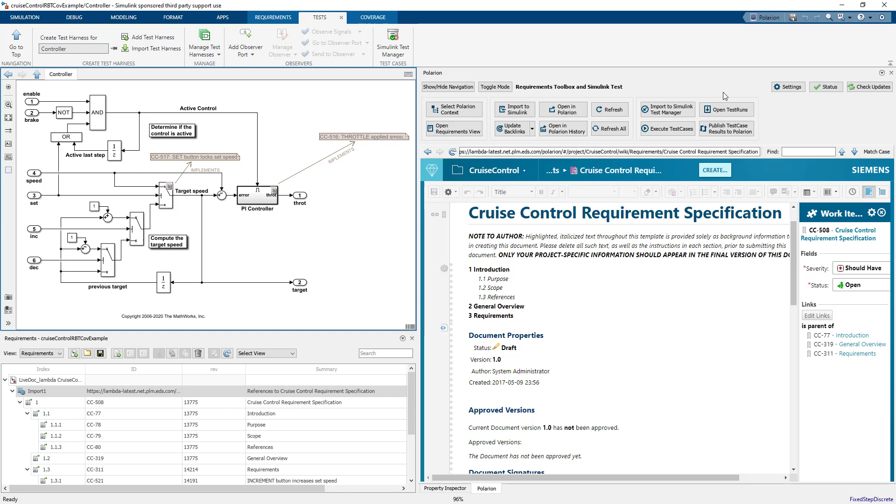So right now we have a requirement specification that's been imported into Polarion, linked to some blocks, and then we've created backlinks inside of Polarion for those blocks as surrogates, and then those surrogates are linked to the requirements back inside of Polarion. So what I can do now is I can switch to our test case specification. We've called it high level cruise control test case specification.

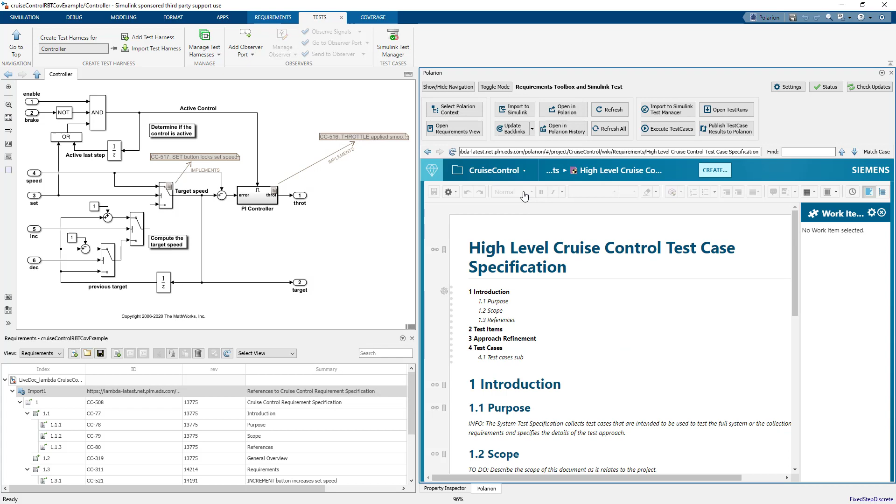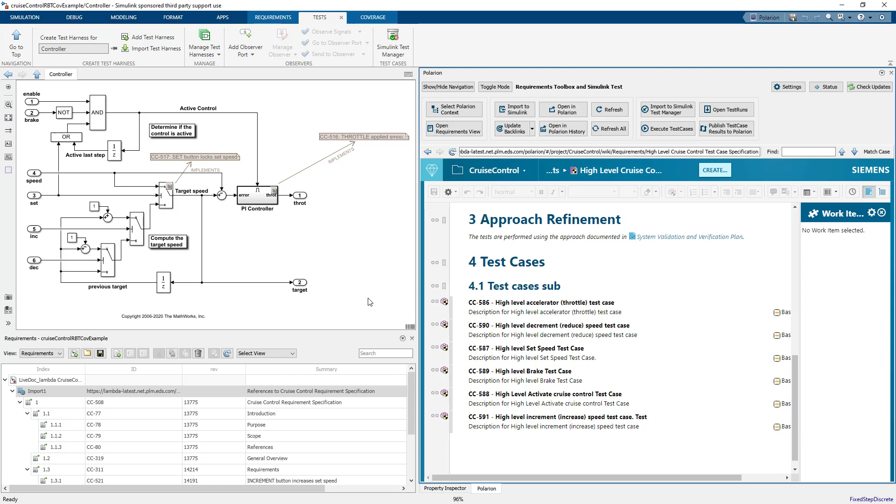If I scroll down in the document, you can see that we have a number of high level test cases that we've created. You'll notice that there's some new buttons now available in the requirements toolbox and Simulink test mode. And all we need to do to import these is to click on the Import to Simulink Test Manager. And what we'll do is we'll take these test cases and we'll create those tests inside of Simulink Test.

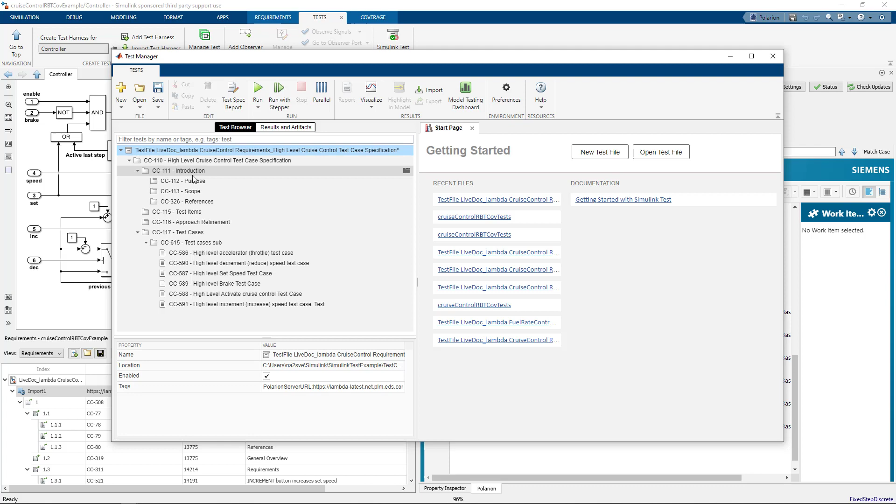So you can see Simulink Test launches now, and you can see the document name. I'll just make that pane a bit bigger. Name of the document. And if I expand all, you can see that the hierarchy of the document is maintained. The headings inside of the document are test suites inside of Simulink Test, and then you can actually see the actual test cases that have come over.

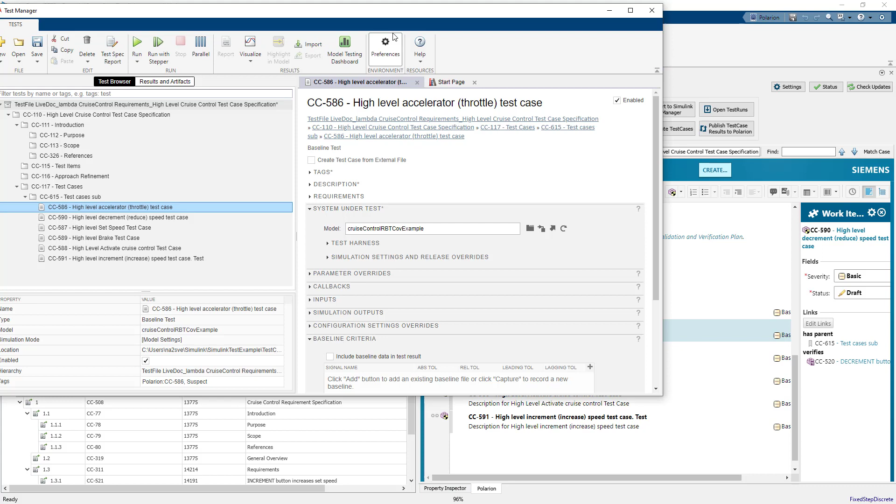Now, some of these test cases already have links to requirements. So if I select, for instance, CC590, you can see that it verifies this requirement. So if I switch back to Simulink Test and look at CC590, for instance, and then look under Requirements, you can see that that requirement relationship also now exists. So the connector automatically created those requirements links to test cases and vice versa.

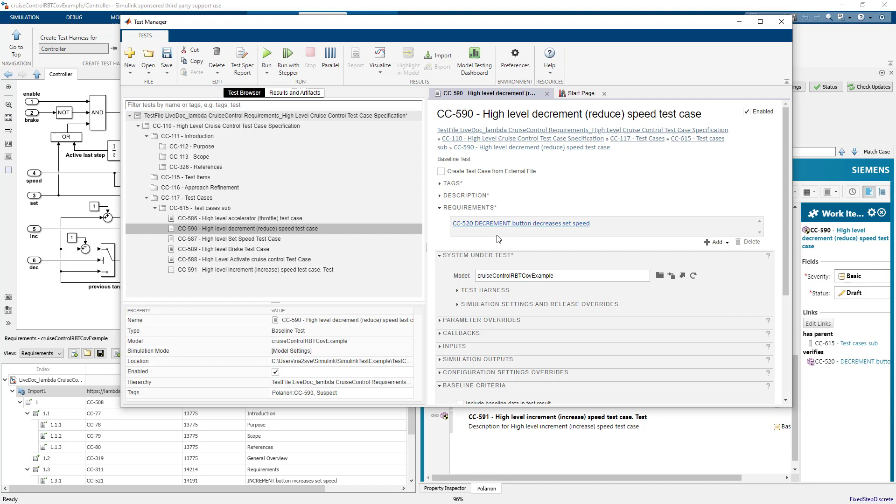You can, of course, modify the document and re-import it, and the changes will be reflected in Simulink Test. You can delete test cases as well. You can also work with revisions of test case documents, but only one revision can exist at any one time in Simulink Test. So you could switch from a head revision like we are today back to an earlier revision, or you could have an earlier revision and switch to the head, or a later revision even as well.

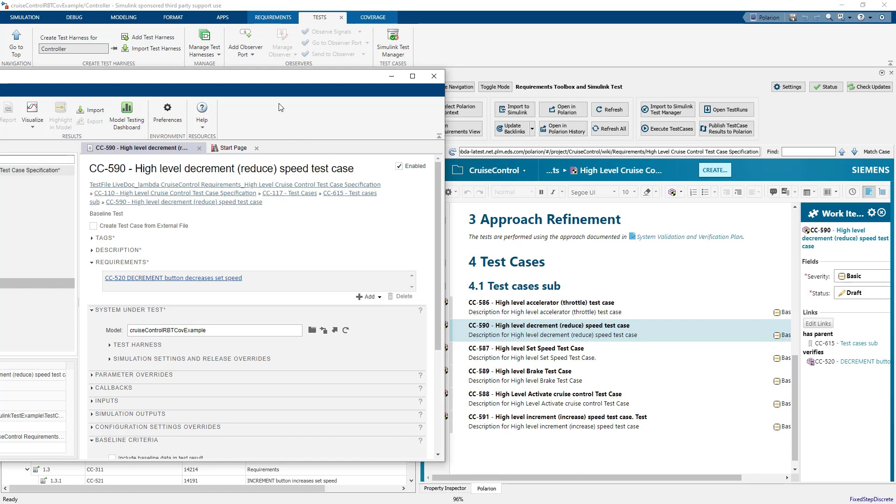You can also work at the project level in Polarion as well, where you're at the tracker view and you've got your test cases, for instance, in the tracker view. You can import those as well, and it would come over as a sort of flat list. And you can also change the behavior even when you're working with the documents. You can choose to ignore the headings and just import the test cases, or you can convert headings to test cases. There's all sorts of different possibilities, and you'll need to check the documentation to do all of those things.

Anyway, once the test cases are over in Simulink Test, and by the way, the descriptions of course come over as well, you may decide then to do one of two things. You could further refine these test cases and make them very specific to the model, add in specific parameters and test scripts and test benches and so on. Or you may choose to define those lower level test cases that are specific to the model and author those directly inside of Simulink Test.

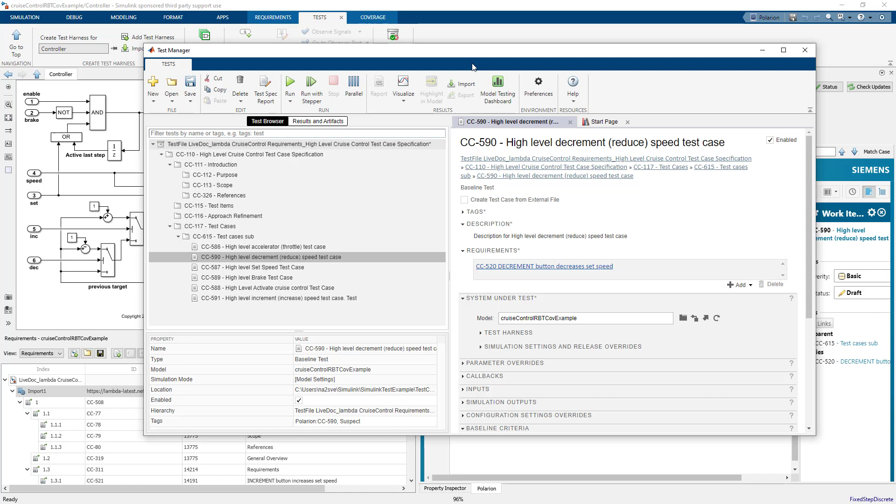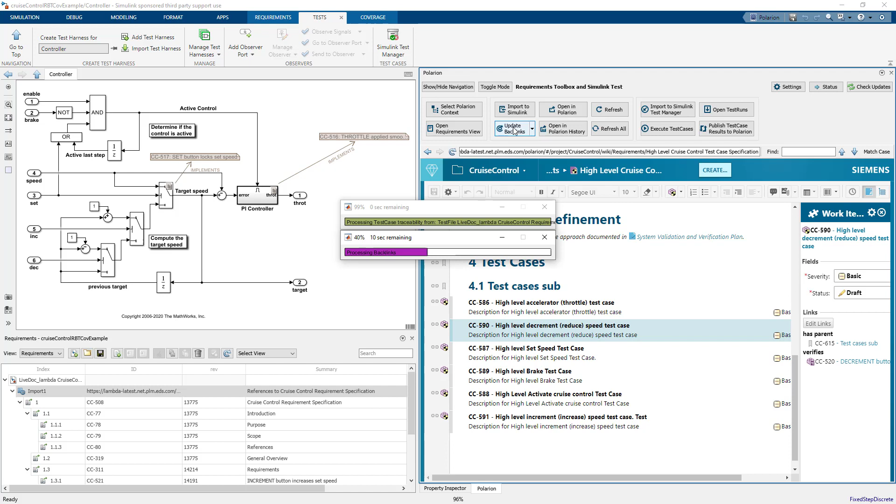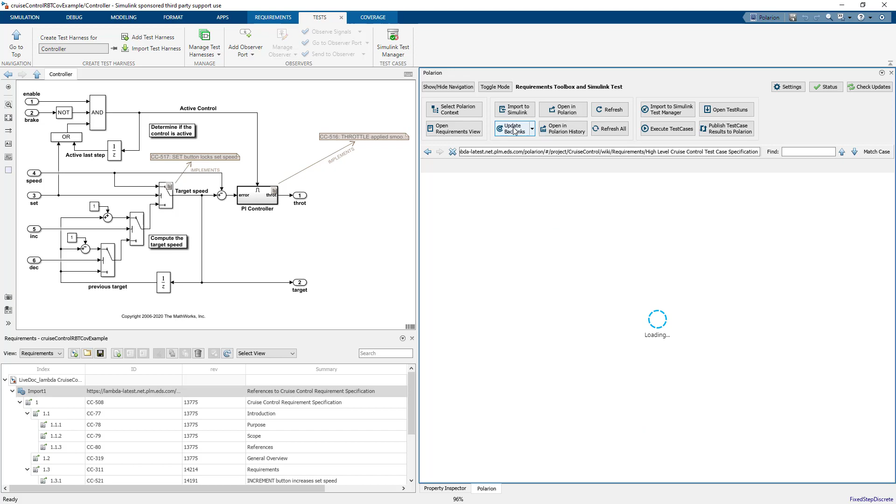In either case, and we'll look at that second case in a moment where we author the test cases directly in Simulink Test, once the test cases have come over from Polarion into Simulink Test, you can choose to update the backlinks. Okay, so what will happen now is if you had modified those test cases that came from Polarion in Simulink Test, when we update the backlinks, we don't modify those original test cases in Polarion. Instead, what we do is we create surrogate test cases for each of those test cases that originated from Polarion.

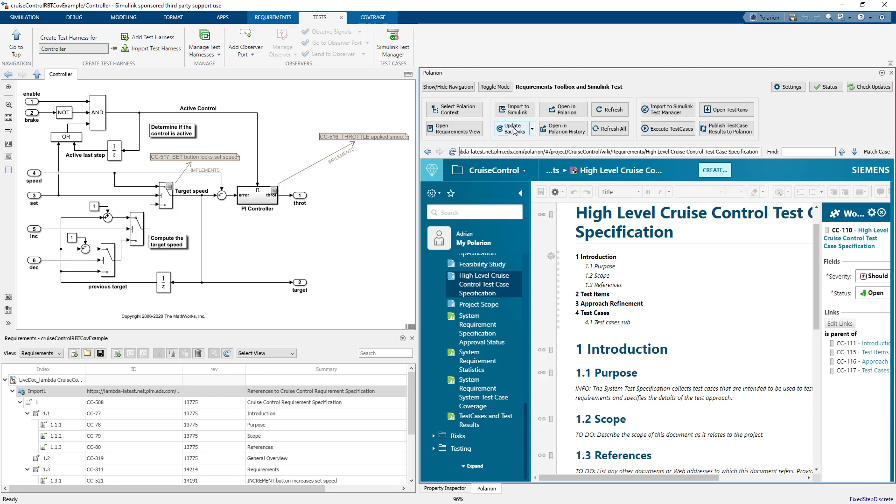Why do we do that? It's because we feel that we don't want to touch the original test cases that came from Polarion. We'll leave those alone. You've refactored those test cases inside of Simulink Test, and now those refactored test cases are reflected back in Polarion as surrogate test cases. And of course, we'll link them back to the requirements.

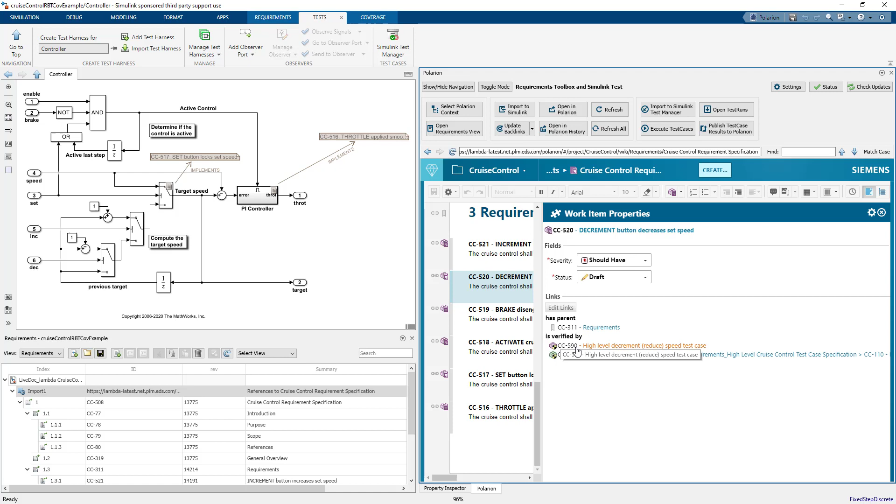So if I go, for instance, to the requirements specification, and if I go down to CC520, now you see that there's two levels, if you like, of test cases it's linked to. There's the high level test cases that were already there to begin with, and then this lower level test case that came from Simulink Test.

And you can see various parameters that are associated with the Simulink Test case. You can see that it is a test case. And it's linked back to, obviously, the original requirement. And there's also a hyperlink that points back to that test case. So I can go from the surrogate test case back to the test case in Simulink Test as well. All right. So that's kind of how that behavior works.

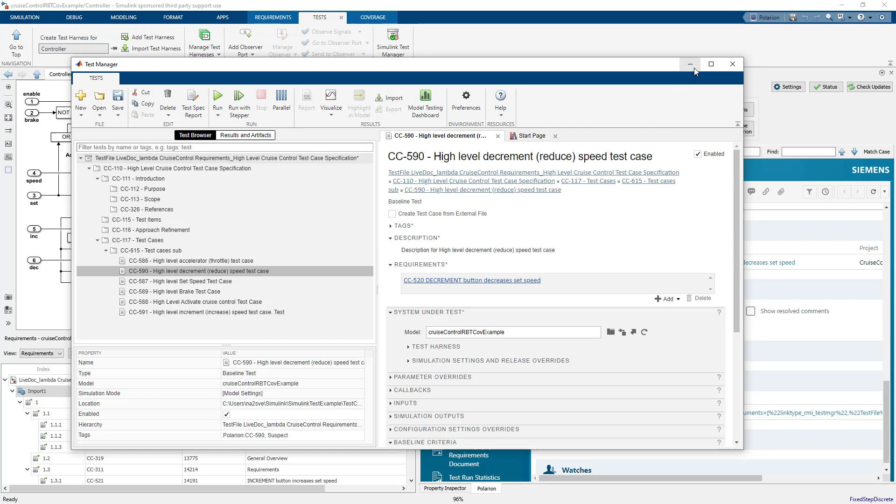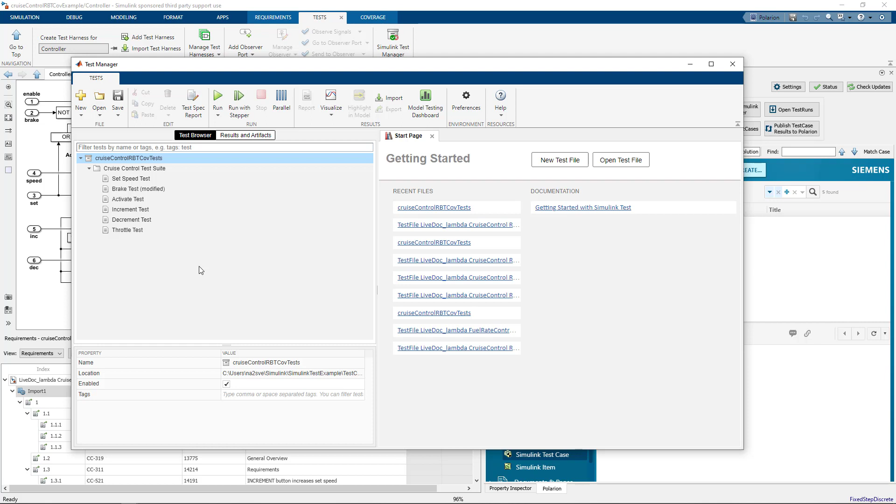But now let's imagine that instead of this, we author the test cases directly in Simulink Test. So what I'll do is I'll get rid of that old test file that we just created that originated from Polarion. Instead, what I will do is I will open up a set of test cases that I authored directly in Simulink Test.

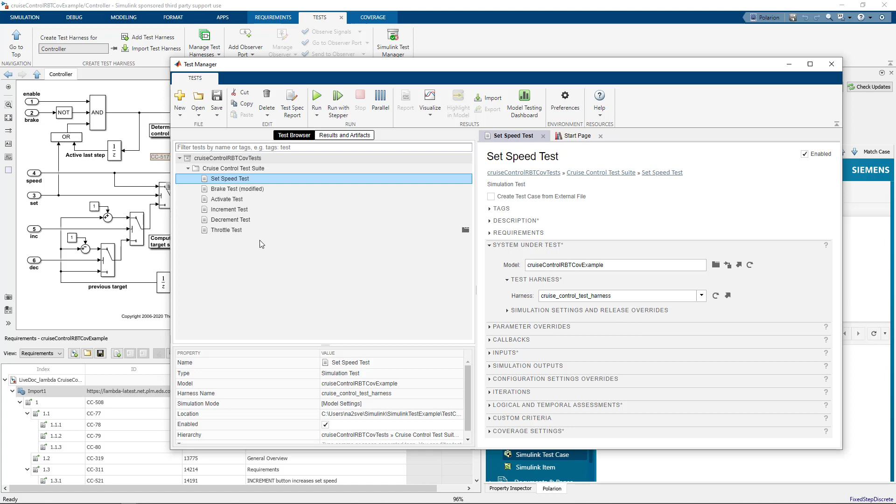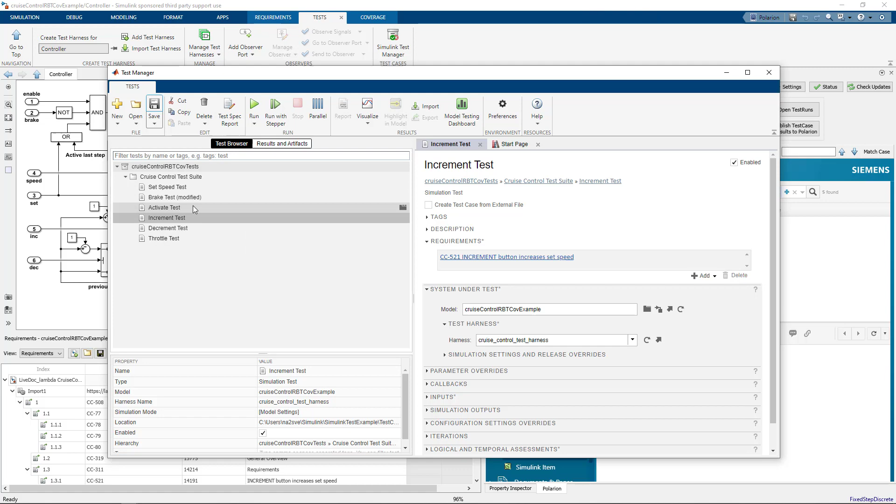Now, each of these test cases have been linked to a requirement that originated from Polarion, as you can see here. There's another one. So what I'm going to do right now is, let me just save that. I'm going to update the backlinks for this set of test cases that originated from inside of Simulink Test. So let's click on Update Backlinks.

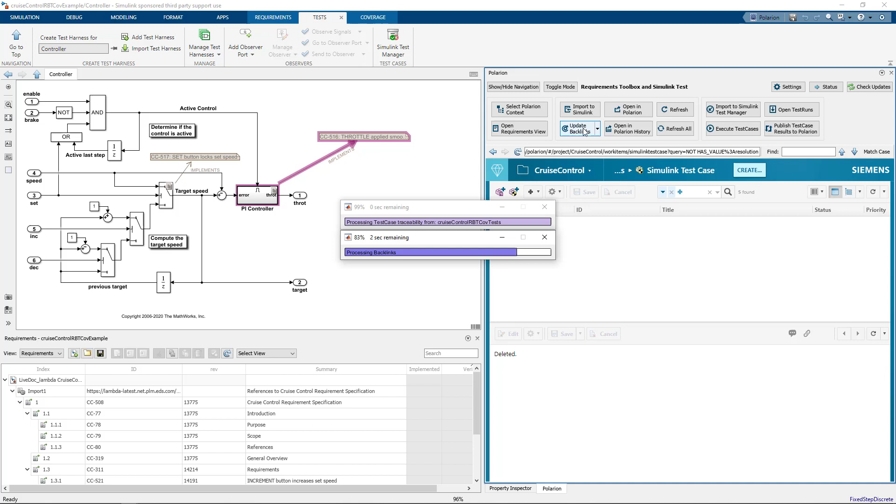And what the connector will do is it will create surrogate test cases for all of those test cases that were authored in Simulink Test that are linked to requirements that originated from Polarion. So you can see here on the screen that we've now got 6 test cases that were authored directly inside of Simulink Test, and they're automatically linked back to, of course, the Polarion requirements, as you can see here.

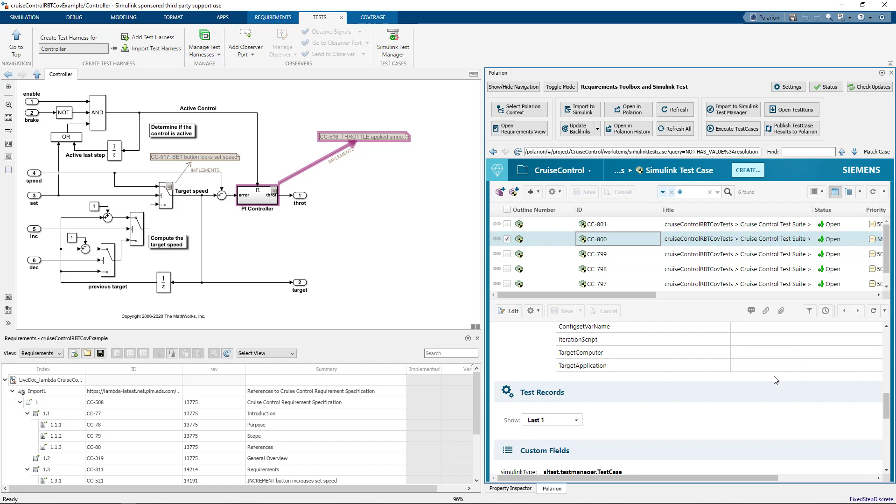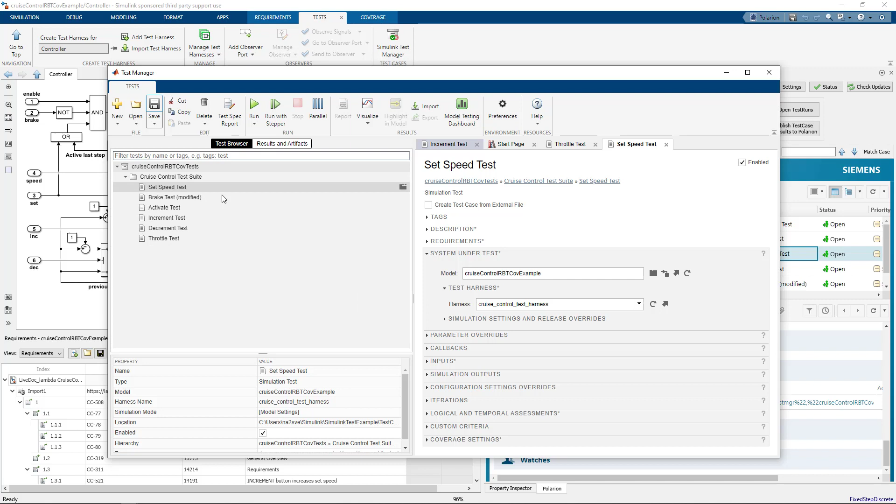If I scroll down, perhaps here, you can see again the properties that are associated with this Simulink Test, and of course also there's a hyperlink that navigates me back to, that's the throttle one. Let's just pick another one. Let's pick set speed, for instance. Let's navigate back to that one, and you can see that it navigates back to set speed here. Okay, so that's how that works. The connector works when you author the test cases directly inside of Test Manager.

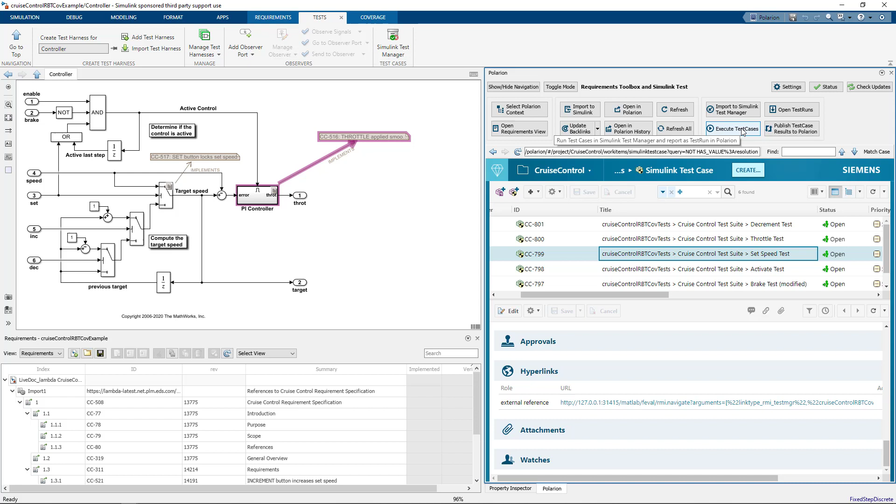So one thing that we can do now when it comes to test execution and test results is that we can execute the test cases directly from the Polarion connector to Simulink pane. So what this does is it will execute those test cases that I've authored in Simulink Test, and then it will collect the test results from those test cases that have been run back inside of Polarion as test runs. So let's just go ahead and do that now. Click on Execute Test Cases,

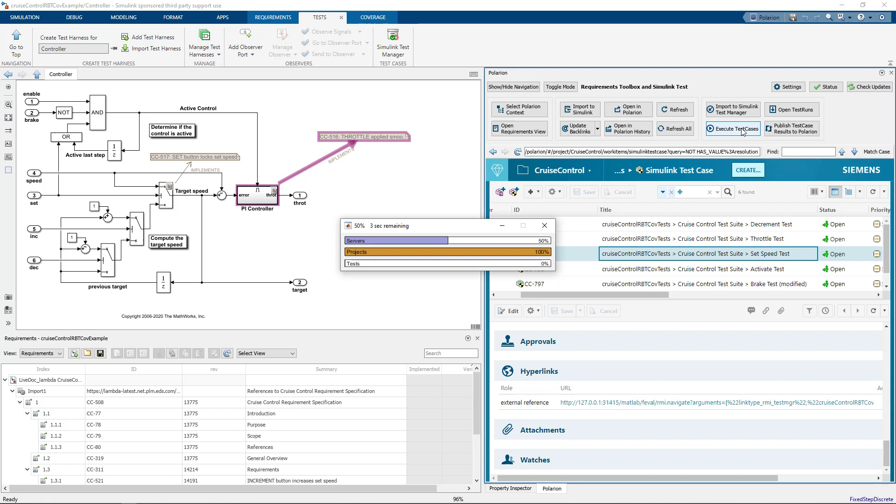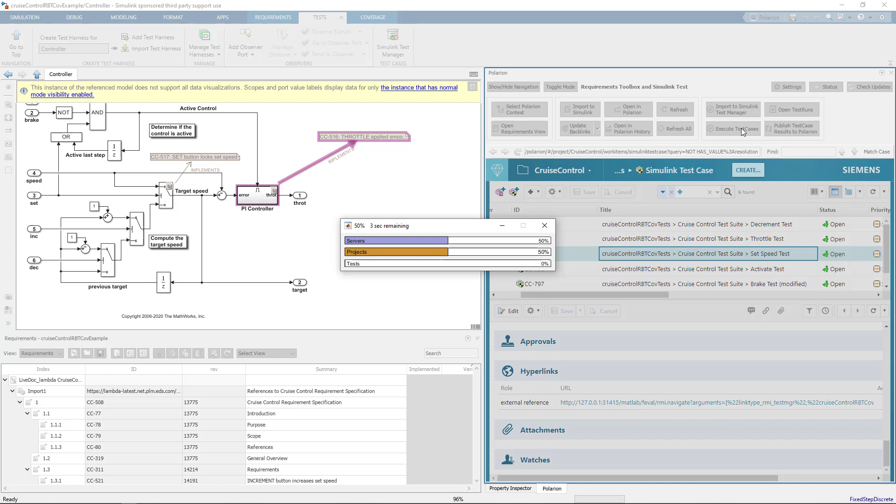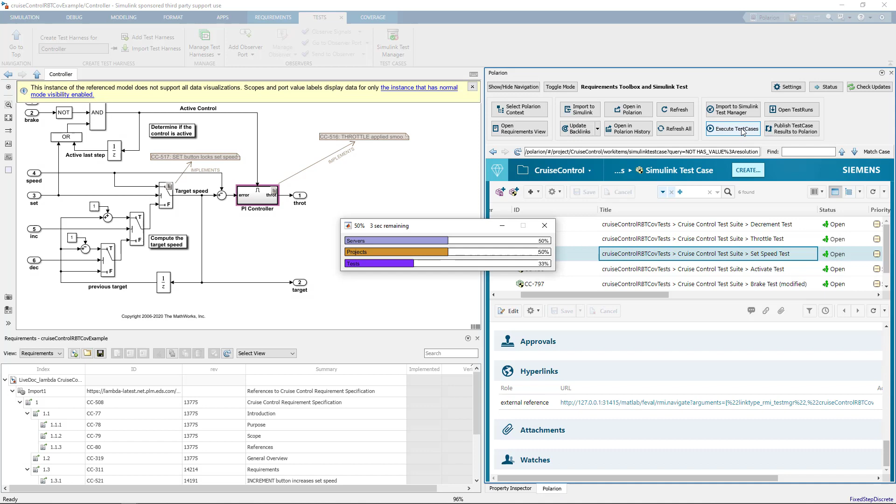and we'll see the model compiling and then running those test cases. So it's going ahead and compiling now. It's starting running. And it's running through the tests one by one. So there were 6 tests, if you remember, that we're going to run. So it's going to run them all. There it goes in purple. So it keeps going through, giving you a percentage. And it's 100% now.

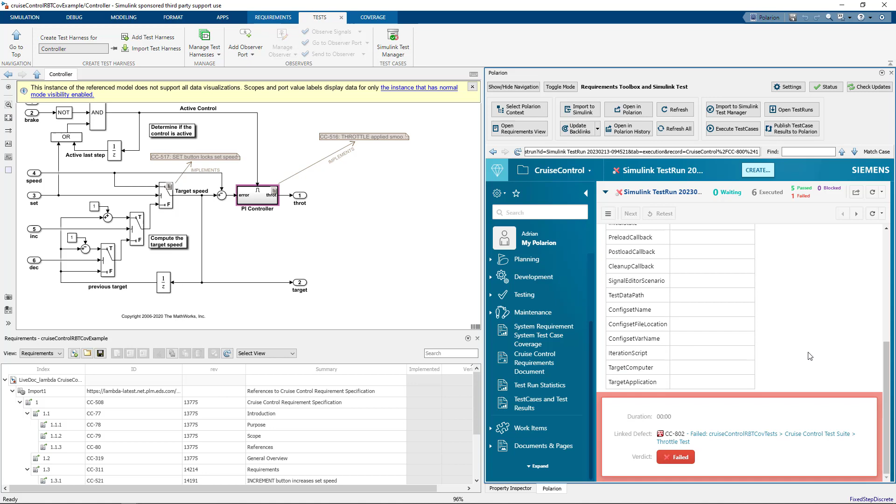And it's come back, and we can see that, in fact, the test case failed. The overall test run failed, I should say. And what's happened is that 5 passed and 1 failed. Okay, so if I select the one that's failed, I can see it's the throttle test. What Polarion has done automatically is raised a defect against that failed test case. So if I select the test case, we can see more information about that, and we can see how it's failed.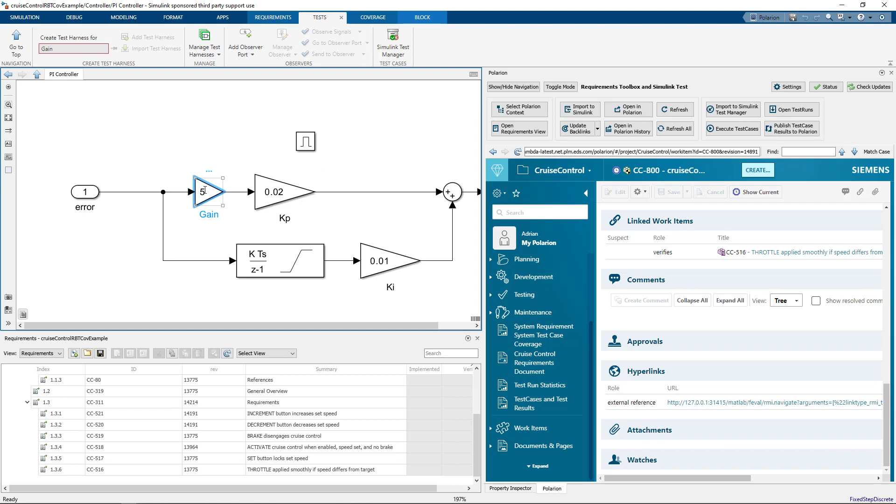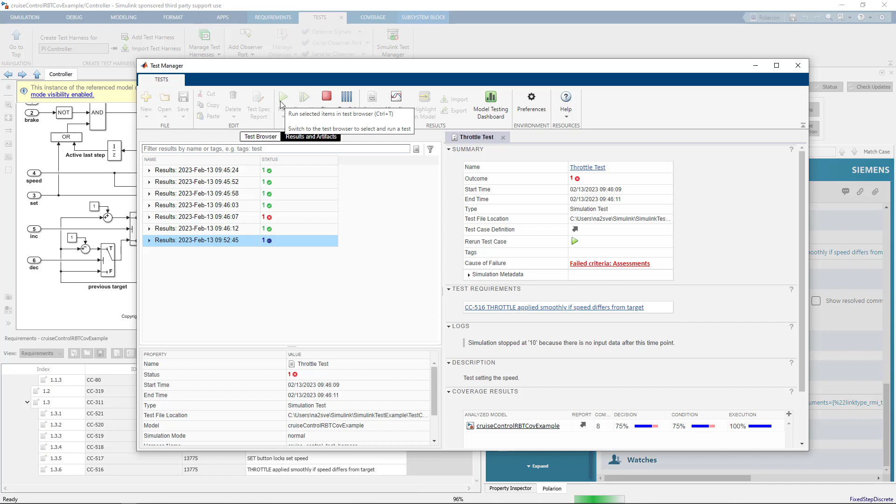Let me select it. Let's go ahead and navigate from Polarion to the test case. We can see that the throttle test failed here. So what I can do is I can go ahead and fix that right now. So let me go ahead and do that. Oops. Change that. I'll go back and save the model. And then what I will do is we'll go back to Simulink Test, and I can choose to run that test directly from Simulink Test rather than from the connector pane. You can see now that the throttle test passed after making the update.

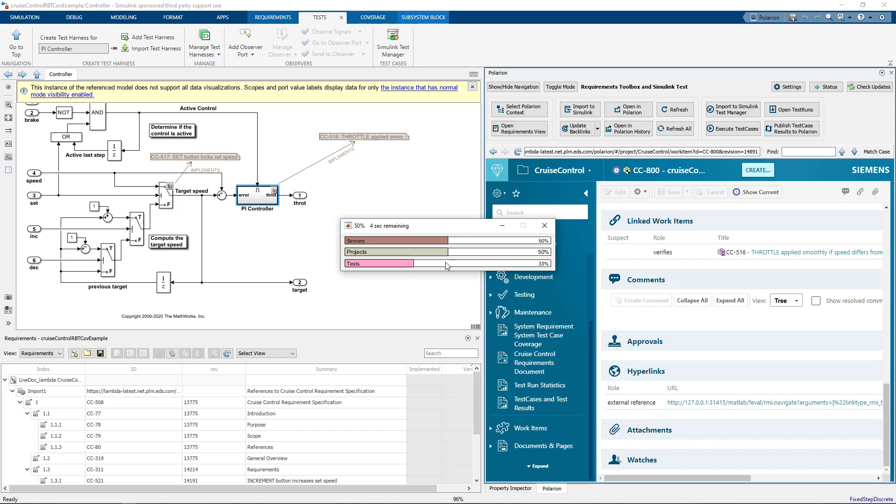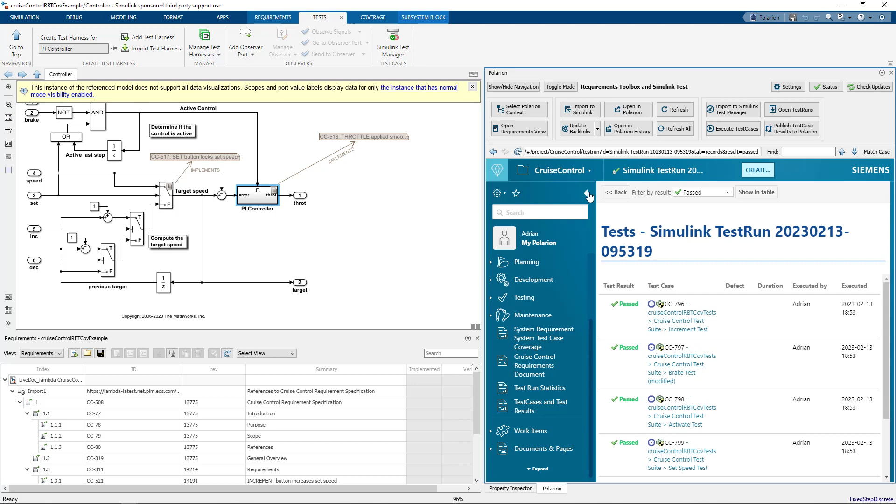So what I can do is I can go back to Polarion, and rather than running the test like I just did from the panel, I could just collect the test case result that I just ran directly in Simulink Test and update it back inside of Polarion. So it'll be reflected as a new test run in Polarion, but we'll show how that works. So you can see here now that all 6 tests passed, and you can see them all shown here inside of Polarion. So that obviously is all good.

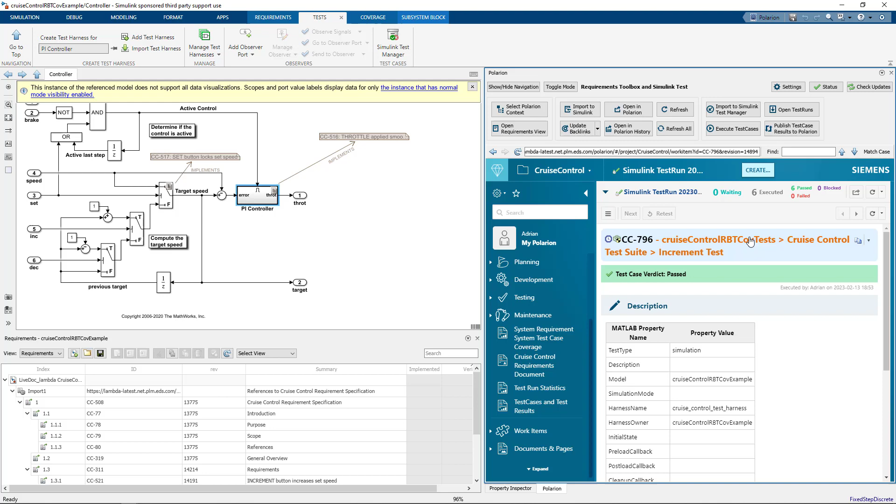For each of the test runs themselves, you can see the various test cases. So if I select the test case, you can scroll down and you can see the test record for that test case, and you can see that it's passed. And of course, we can navigate back to Simulink Test as well. So

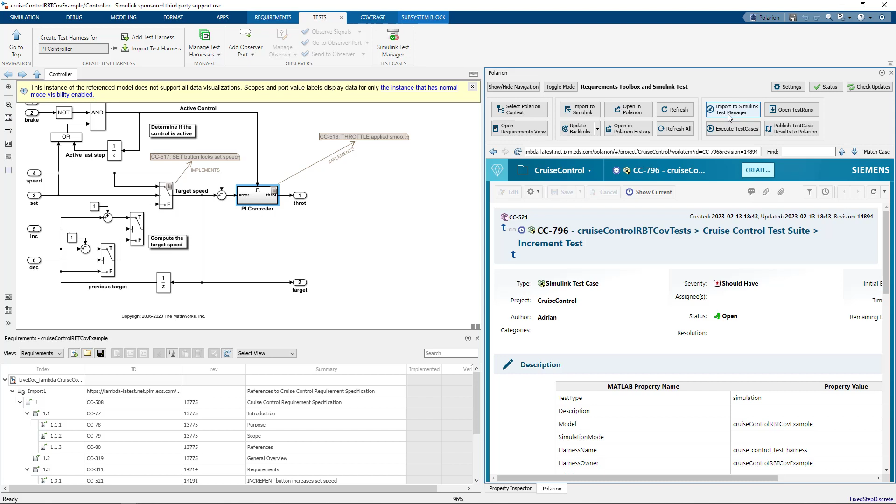that's that behavior. There's one final thing I forgot to mention, one thing that's kind of handy is that there's an open test run button. So what it will do is it will automatically open Polarion and pre-select the Simulink Tests template that's used to create these test runs. Because if you have lots of different tests that you're managing inside of Polarion, you just want the Simulink Tests in this case rather than the other tests as well.

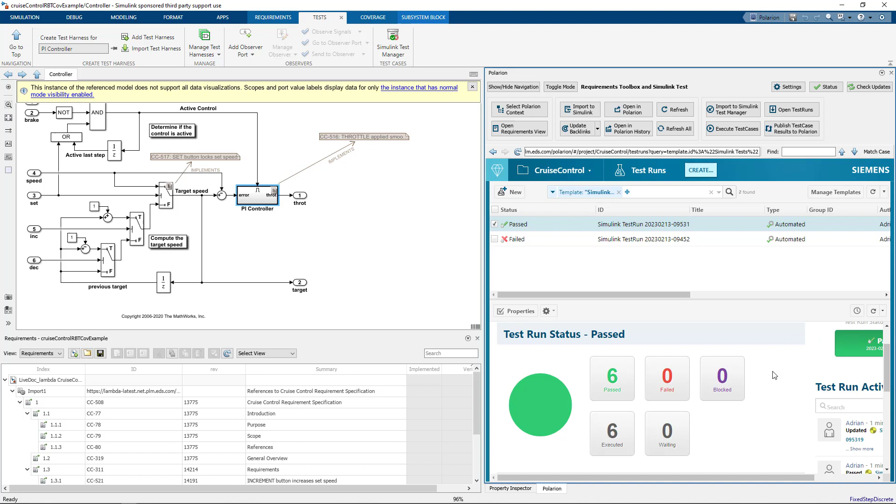So anyway, that is a very short demo, or as short as I could make it, showing some of the new functionality of Simulink Test support. Be sure to check out the documentation, because there's lots of things that I didn't have time to mention that are probably useful, so you should definitely consult the documentation. And we look forward to you using this new capability of the Simulink Test support.